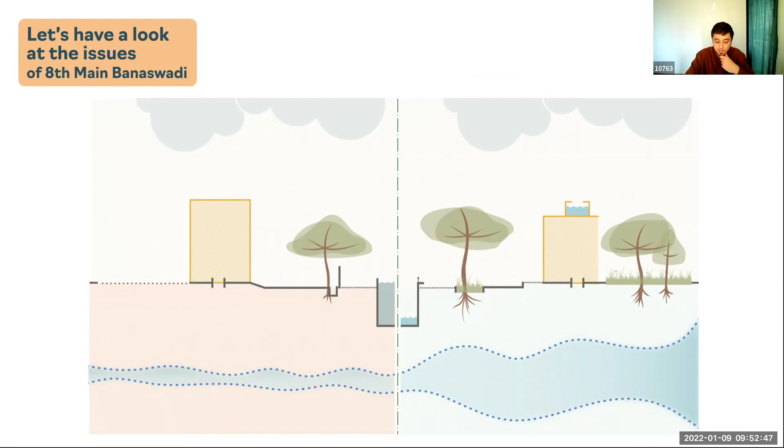Firstly, excessive construction has reduced our groundwater levels and its capacity to recharge. Because of this, stormwater is forced into the Rajakaluve, causing uncontrollable flooding.

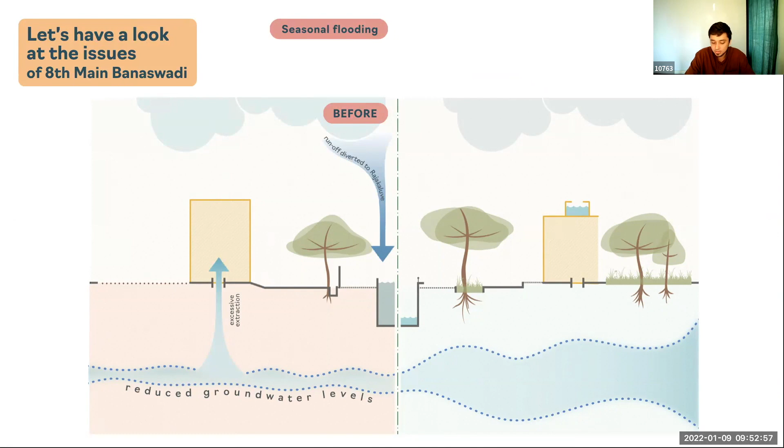Secondly, garbage is dumped along the streets and inside the canal. This creates foul smells and contaminates our water systems. Waste is also diverted to landfills, causing the same issues elsewhere, but at a much larger scale.

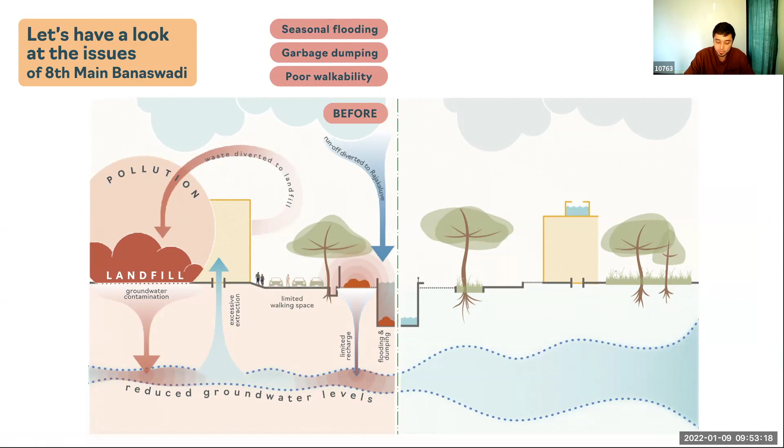Finally, a lack of footpaths and lighting make our streets unsafe for pedestrians. Our proposal is simple: we aim to solve a significant part of these issues here itself.

Now on the right side, we can solve this with a few strategies. First, we increase the ground's recharge capacity, which mitigates seasonal flooding. Second, we create a clean, healthy environment by implementing innovative ways of managing waste. And finally, we make our streets and public spaces more accessible, vibrant, and safe.

We solve our problems ourselves instead of passing them on to the next community or generation.

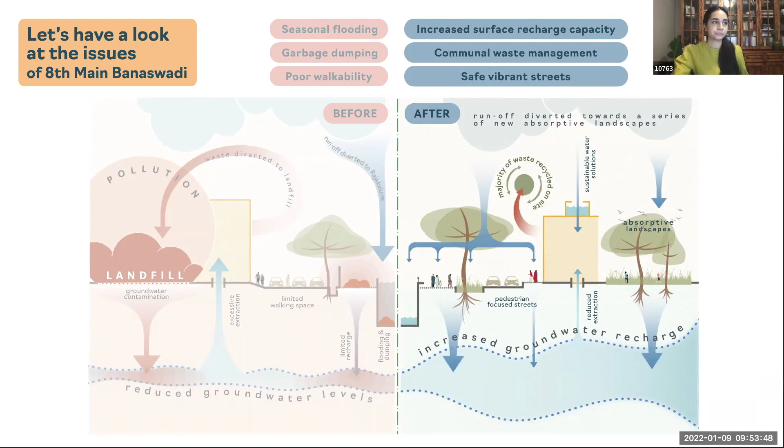This plan gives you an overview of the target area, from 3rd Cross Junction on the left to 4th Cross Junction on the right. At 3rd Cross Junction, currently, busy traffic mixes with street vendors and pedestrians in a flood-prone zone. We've turned this into a street food plaza where existing vendors and their customers are safely separated from road traffic as they enjoy the well-shaded food court.

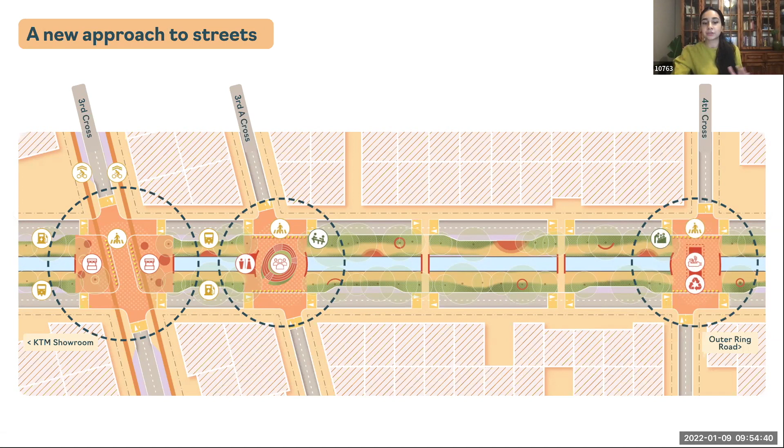A nearby auto stand and bicycle share stand makes this hub easy to access. 3rd A Cross Junction features a focal gathering space equipped with convenient public toilets and drinking water fountains. At 4th Cross Junction is a new branch of Bengaluru's Dry Waste Collection Center initiative, an education hub where caretakers and action groups collaborate towards community-led solutions for waste management.

If you notice, the canal itself is mostly unchanged. The proposal bridges across the canal at key junctions where outdoor community spaces have been placed. This ensures that the community spaces get maximum visibility while not being placed directly in front of any adjacent houses, respecting the privacy of the residents. Doing so also ensures minimal impact on the historic canal. The interventions are easy to implement as they work within the existing framework of roads and services.

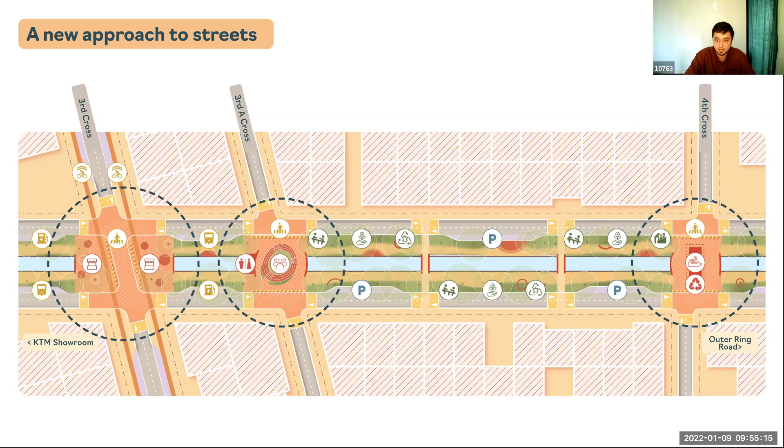Let's see these interventions in detail in the following slides. So what does a day at the new Rajakaluve Park look like? The 3 junctions are connected by vibrant walkways and bridges along the canal, shaded by the existing trees.

The ground is finished with hollow pavers, bioswales, and rain gardens planted with native species, which all allow water to be absorbed. This helps recharge groundwater and mitigates the risk of flooding.

The pathways weave through a series of play, seating, and gathering spaces for all ages. Bright and colorful signage ensures safe movement, and identification boards for native plants and animal species make the experience of the park interactive, while also bringing awareness to our non-human neighbors.

Hazardous elements such as transformers along the streets have been raised out of reach of children, and the park is uniformly lit with a combination of lower level bollard lighting and an engineered suspended lighting system. This system holds the trees in place and prevents them from leaning towards the building. By positioning all the lights below the canopy line, the lighting remains unobstructed.

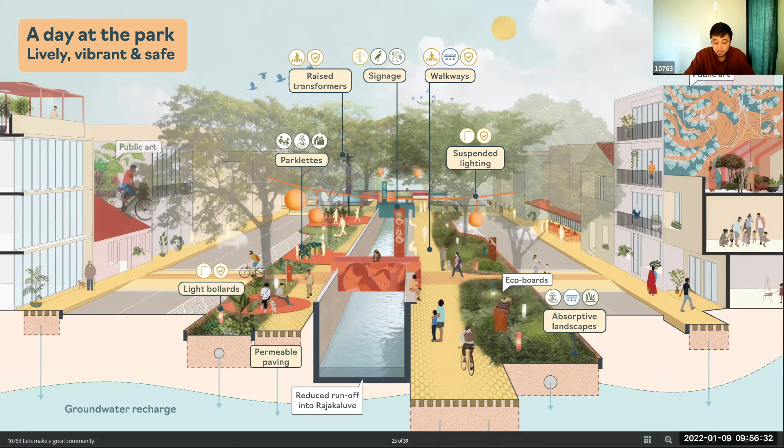This lighting creates a charming atmosphere and adds to the beauty of the Rajakaluve while providing good visual security. Finally, the entire park features murals by talented local artists.

Let's look at the third A-Cross junction. Bridging across the Rajakaluve here makes the HRBR park directly accessible for residents on the other side of the canal. The neighborhood walkability improves, as does the health and participation of its residents.

The Gathering Circle is an outdoor amphitheater, perfect for inclusive community events like a children's book reading, a senior social circle, or a health and wellness exercise for BBMP street sweepers. The entire zone is pedestrian only, well lit, and colorfully decorated by murals. The area is also equipped with a net zero toilet with drinking water fountains.

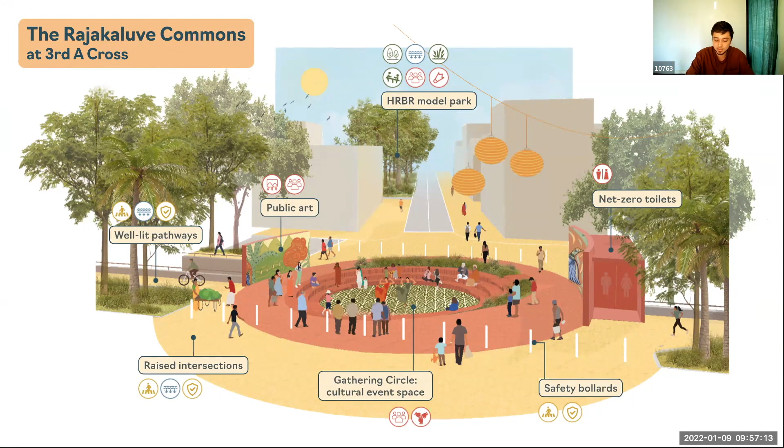A space like this aims to serve all user groups. It's convenient for the coconut seller, it provides options for the auto driver, and it's safe for local runners, walkers, and cyclists. Public spaces that are beautiful, functional, and inclusive are proven to instill a sense of ownership and responsibility towards the space.

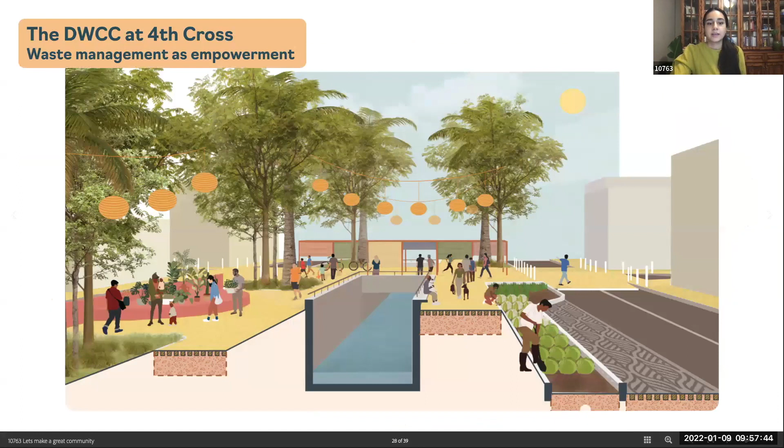In an exciting step towards decentralizing waste management, the fourth cross junction is home to the new dry waste collection center, a convenient spot for residents and other users to drop off their waste, solving the dumping issue.

A good community should facilitate economic and social growth for its members. This is also known as upward mobility. BBMP waste workers with organizations like Sahas segregate and upcycle waste into useful items like mats, pots, bags, plates, and more. The products can be sold or used at vendor stalls to make supplemental income for the workers.

At communal composting zones, wet waste creates fertilizer for sale and for the upkeep of community gardens and plantings along the canal. The composting is run and maintained by an existing neighborhood nursery that has now been given a dedicated space to sell their plants at the Rajakaluve Park.

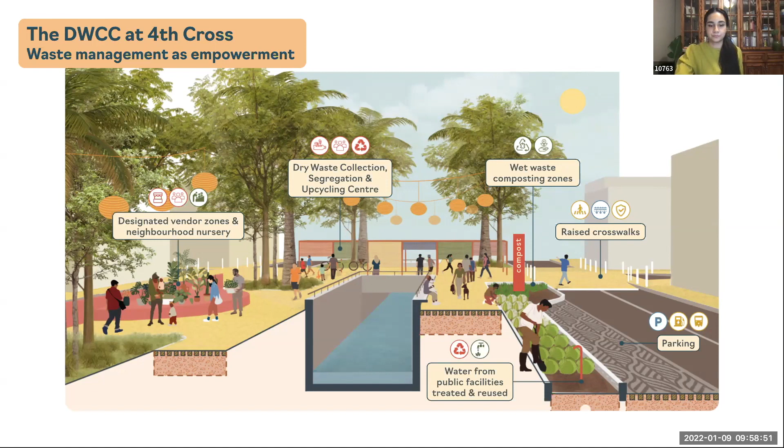With guidance from experts like the Daily Dump, the newly appointed gardener educates street vendors and residents on proper wet waste management. The nursery head, volunteers, local families, and waste workers all engage in this circular relationship. This community manages its own waste simply by having a space to do so.

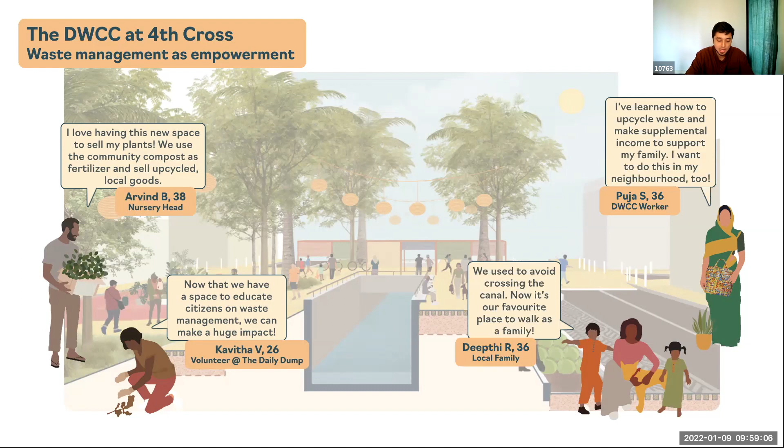Bengaluru's lakes are responsible for holding and recharging massive amounts of stormwater, but their slow disappearance is making the city even more prone to flooding. These existing large open spaces and future developments hold the key to mitigating the city's flooding. They can be designed as seasonal water bodies that fulfill the purpose of these disappearing lakes.

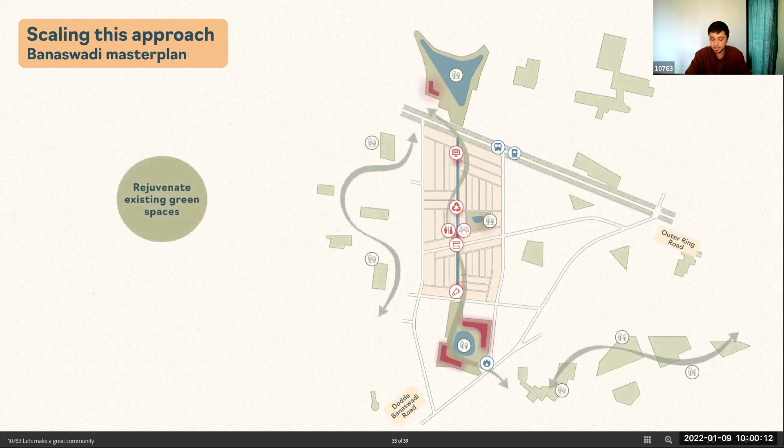This re-envisioning can set an example for other communities to follow. As we connect these spaces, we keep attaching smaller communal spaces such as the street food plaza, the amphitheater, the wet waste management center, sports areas, and so on. These add vibrancy and liveliness to the streets. It's that simple. We rejuvenate our greens, attach communal spaces, and connect them with vibrant streets. Easy.

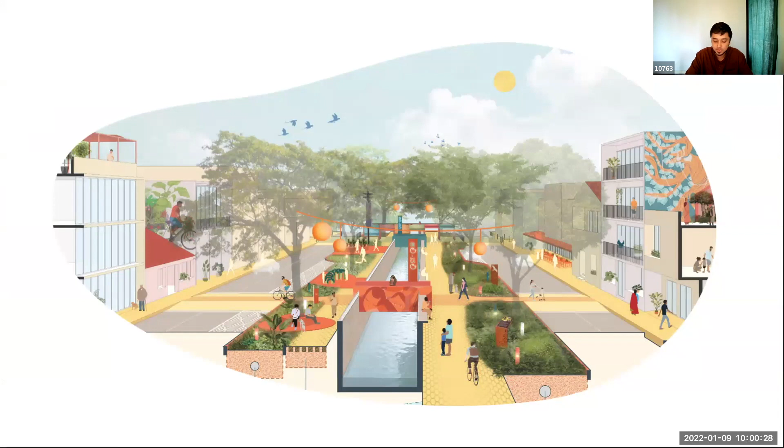Secondly, we'd like to share an observation a community representative made during the workshop. He said, at the end of the day, you're planners and designers and can only do the foundational work for us. After that, it is our responsibility to respect the space and use it correctly. An important part of that is a change in the attitude of the people here. We could not agree more.

That is why our interventions focus on giving a platform to all user groups to interact and work together. Our hope is that all of this collective action, along with this historic water body, instills a shared identity in the Banaswadi Rajakaluve people. A community that shares the same spaces, takes care of its own waste, takes pride in its diversity, its public spaces, its caretakers, its artists, its flora and fauna, and its effort to heal Bengaluru. A community that is inclusive, accessible, accommodating, charming, and safe. Let's make a great community.